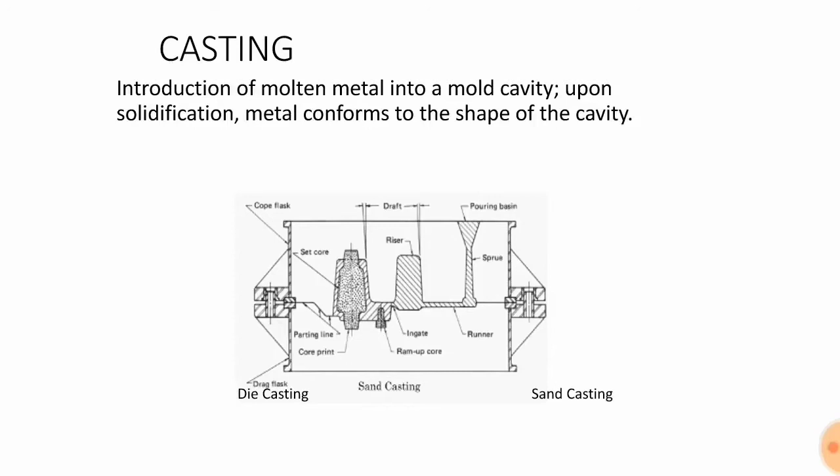Introduction of the molten metal into a mold cavity is called casting. Upon solidification, metal conforms to the shape of the cavity. This is the diagram showing the casting process. A sand mold is prepared and molten metal is filled into the sand mold and is kept to dry. Hence the cast is produced.

Casting: pouring molten metal into a mold shaped after the part to be produced, allowing it to harden and removing it from the mold. It can be used to create complex internal and external part geometries. It can be used with any metal that can be heated to its liquid phase.

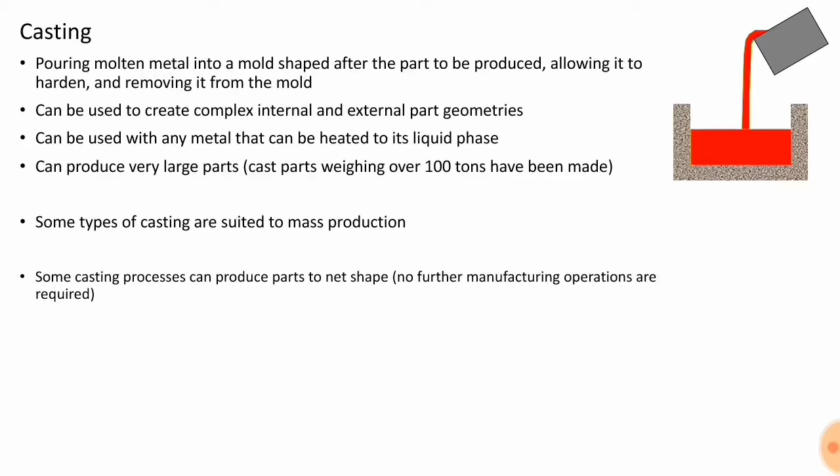It can produce very large parts. Cast parts weighing over 100 tons have been made. Some types of casting are suited to mass production. Some casting processes can produce parts to net shape.

First of all, on a clean floor, we will set the inverted drag box. Then we will place the pattern inside the box and pour the sand into the box. After that, sand is rammed and leveled off.

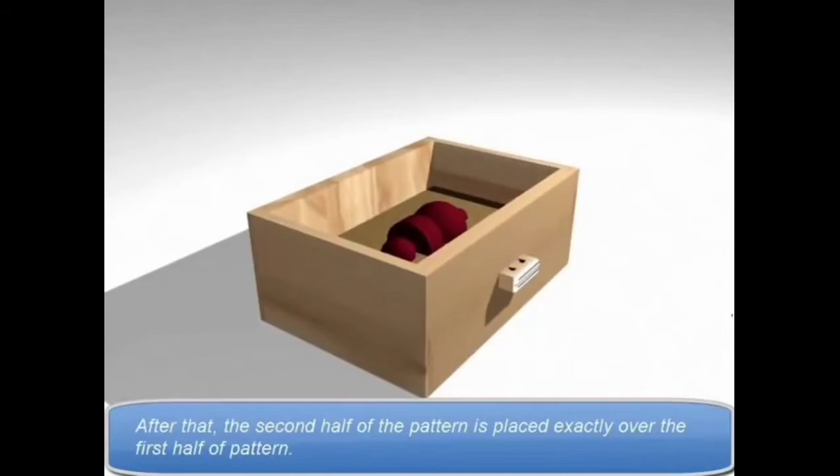The packed drag box is then turned over and the cope box is placed over it. After that, the second half of the pattern is placed exactly over the first half of the pattern. Then the sand is filled and rammed tightly.

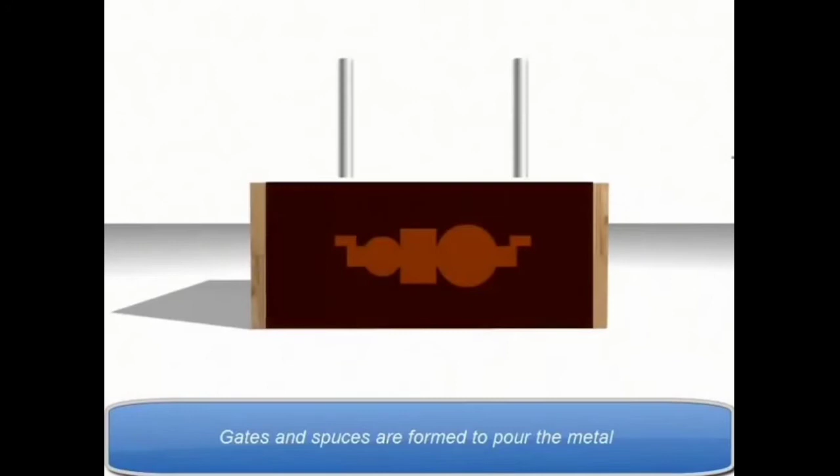Now the two boxes are opened and the pattern is removed with the help of screws. Boxes are again put back into position and clamped with rivets to prevent the upper box floating. Gates and sprues are formed to pour the metal.

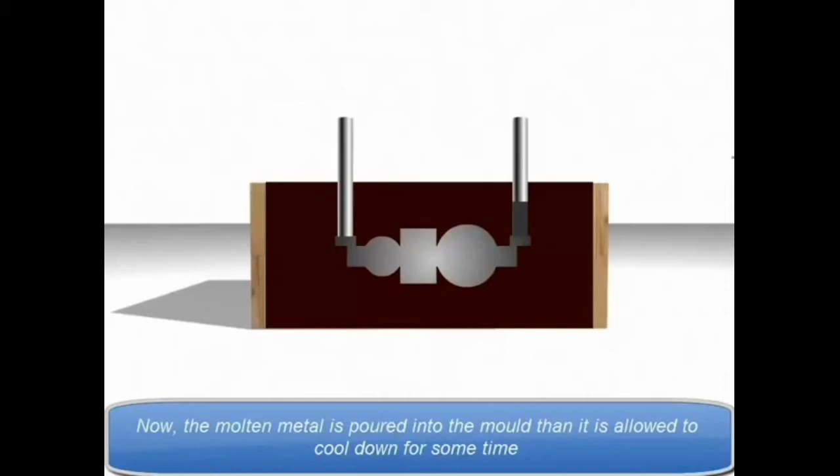Now the molten metal is poured into the mold. Then it is allowed to cool down for some time. After cooling, the final cast is taken out.

Casting terminology. Flask: a metal or wooden frame without fixed top or bottom in which the mold is formed. Depending upon the position of the flask in the molding structure, it is referred to by various names such as drag, lower molding flask; cope, upper molding flask; cheek, intermediate molding flask used in 3-piece molding.

Cope: the top half of any part of 2-piece molds. Drag: the bottom half of any part of 2-piece molds. Core: inserts made from sand. They are placed in the mold to form hollow regions. Core print: a region used to support the core.

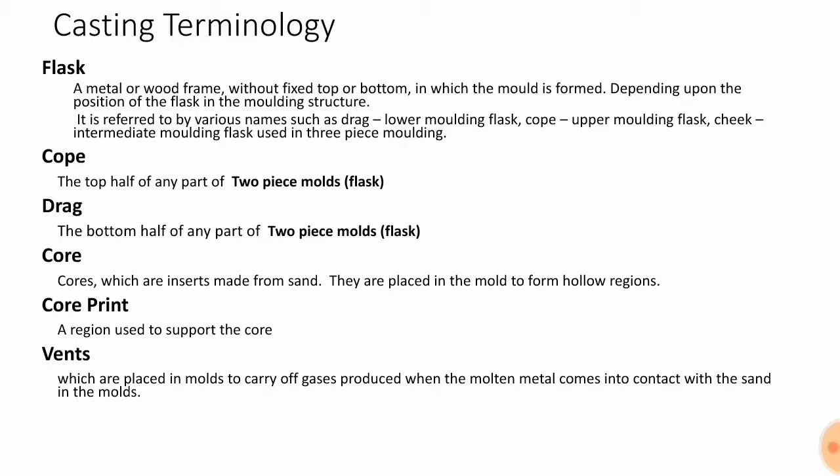Vents, which are placed in molds to carry off gases produced when the molten metal comes into contact with the sand in the molds. Mold cavity: the hollow mold area in which metal solidifies into the part. Risers, which supply additional metal to the casting as it shrinks during solidification.

Gating system: a gate which is located at the base of the sprue. Molds typically contain a system of gates constructed to minimize turbulence in the molten metal and control flow so that metal is supplied at a rate to adequately supply the critical section thickness of the casting. Gating systems often include passageways called runners.

Pouring cup: a pouring basin or pouring cup into which the molten metal is poured. Sprue: a sprue through which the molten metal flows downwards. Runners: horizontal channels. Parting line or parting surface: the interface that separates the cope and drag of a two-part mold. Draft: taper on a pattern or casting that allows removal from the mold.

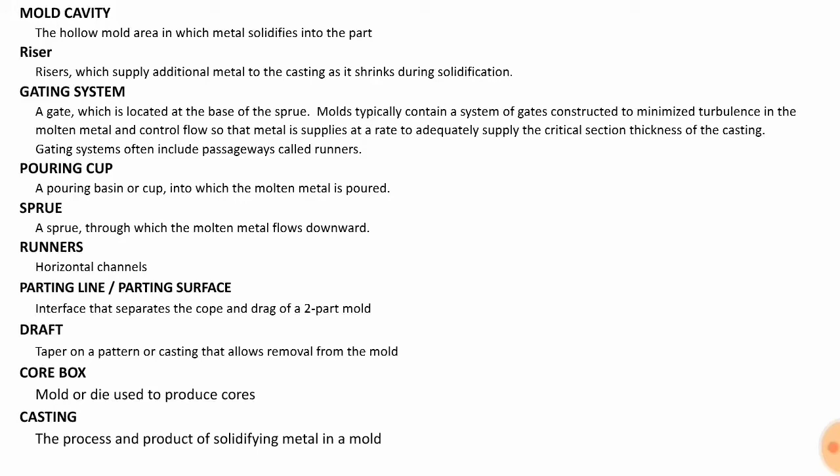Core box: mold or die used to produce cores. Casting: the process and product of solidifying metal in the mold.

Requirements of casting. Mold cavity with desired shape and size. Melting process to provide molten metal. Pouring process to introduce the metal into the mold. Solidification process controlled to prevent defects. Ability to remove the casting from the mold. Cleaning, finishing and inspection operations.

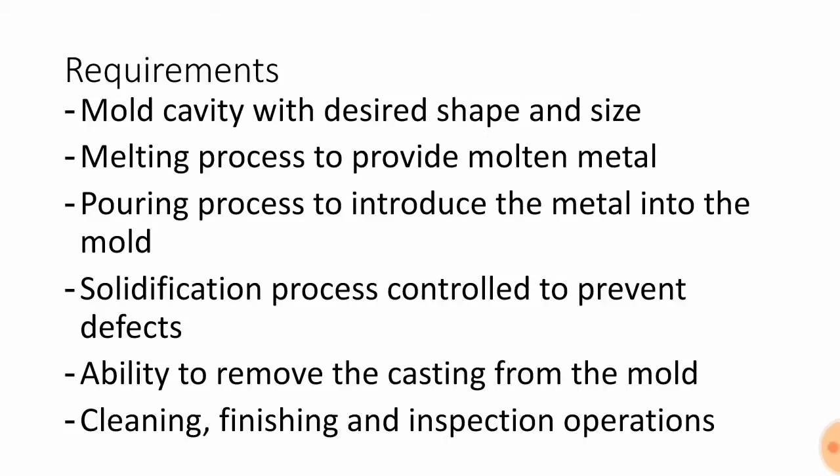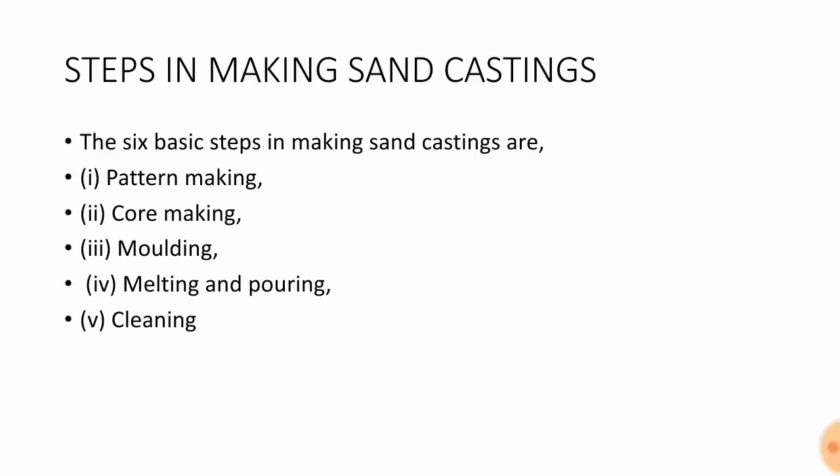Steps in making sand castings. The 6 basic steps in making sand castings are pattern making, core making, molding, melting and pouring, and cleaning. Pattern making. Pattern: replica of the part to be cast, used to prepare the mold cavity. It is the physical model of the casting used to make the mold, made of either wood or metal.

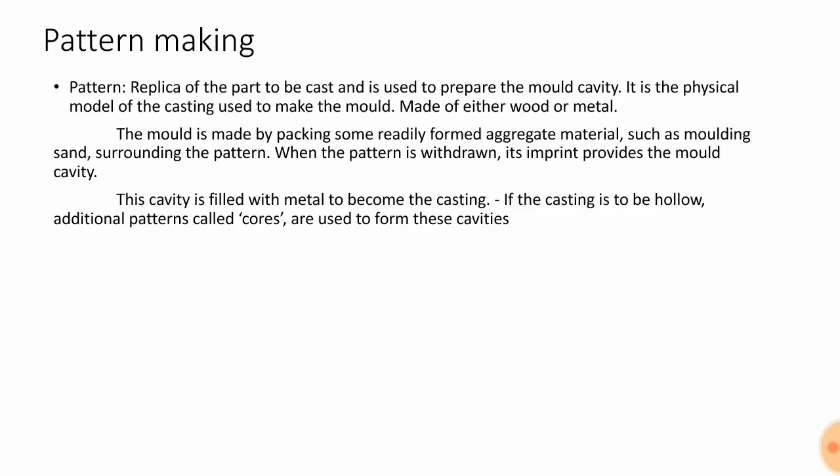The mold is made by packing some readily formed aggregate material such as molding sand surrounding the pattern. When the pattern is withdrawn, its imprint provides the mold cavity. This cavity is filled with metal to become the casting. If the casting is to be hollow, additional patterns called cores are used to form these cavities.

Core making. Cores are placed into a mold cavity to form the interior surfaces of castings. Thus, the void space is filled with molten metal and eventually becomes the casting. Molding is nothing but the mold preparation activities for receiving molten metal. Molding usually involves preparing the consolidated sand mold around a pattern held within a supporting metal frame, removing the pattern to leave the mold cavity with cores.

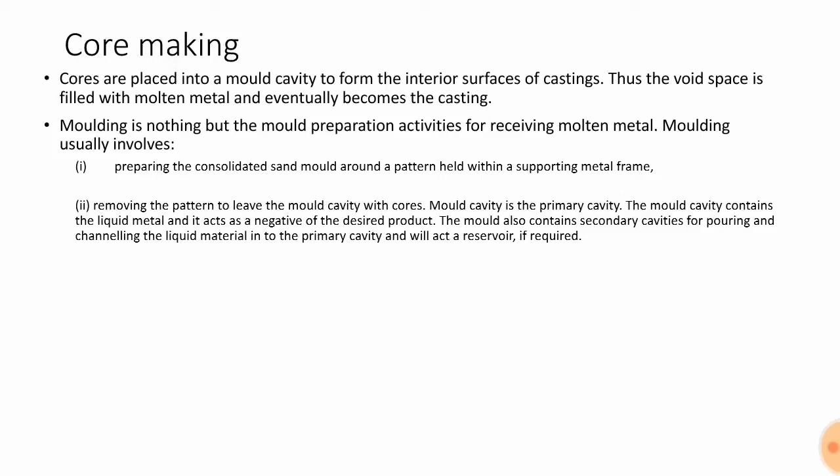Mold cavity is the primary cavity. The mold cavity contains the liquid metal and it acts as a negative of the desired product. The mold also contains secondary cavities for pouring and channeling the liquid material into the primary cavity and will act as a reservoir if required.

Melting and pouring. The preparation of molten metal for casting is referred to simply as melting. The molten metal is transferred to the pouring area where the molds are filled.

Cleaning involves removal of sand, scale and excess metal from the casting. Burned-on sand and scale are removed to improve the surface appearance of the casting. Excess metal in the form of fins, wires, parting line fins and gates is removed. Inspection of the casting for defects and general quality is performed. So this is the short video of the casting process.